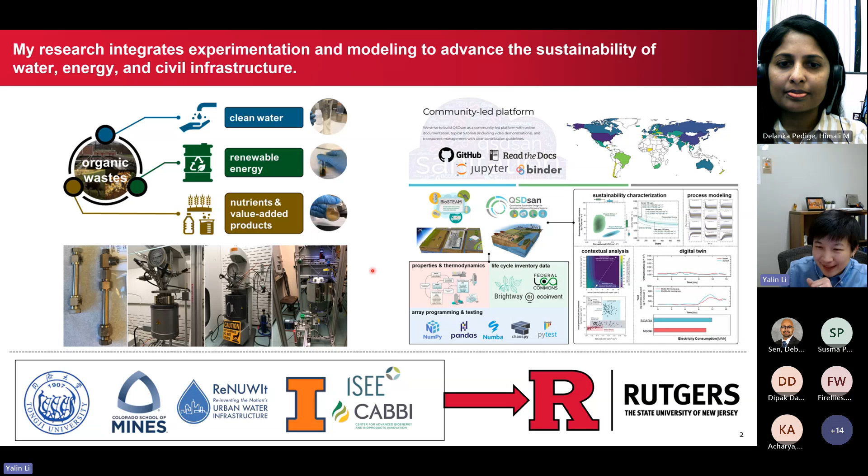And then as we are trying to reduce our greenhouse gas emissions in this sector, there are a lot of legislations or incentives from the federal and state levels to essentially try to incentivize the use of low carbon emission concrete.

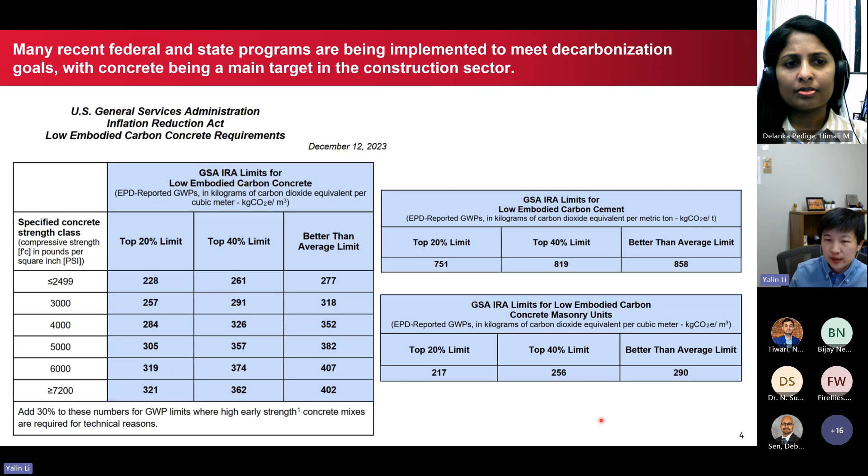As you can see on the left side, it's essentially for different strength classes of the concrete. It sets the upper limit of the greenhouse gas emissions. And then on the right are essentially the different tables for cement as well as for the concrete masonry units.

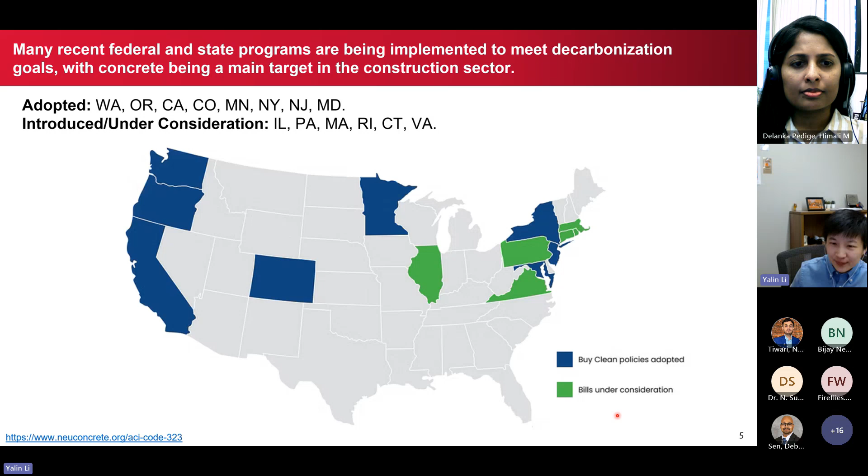And then the green ones are the ones that have either introduced this bill or there are bills under consideration for similar efforts. And this includes Illinois, Pennsylvania, Massachusetts, Rhode Island, Connecticut, and Virginia. And then to tell you a little bit more about what those laws can look like, I'm giving the example of New Jersey.

New Jersey passed two legislations to provide a tax credit to incentivize the procurement of low embodied carbon concrete. This applies for both the corporate business tax and gross income tax, so it's both to the consumers and also to the business. The first one is called Public Law 2021, Chapter 278. It was passed in 2021.

It essentially provides a tax credit of $2 per square foot of unit concrete products if it meets the following requirements. First of all, it has to demonstrate over 50% reduction in greenhouse gas emissions, and then you have to buy more than 100 square feet of that. And then it sets a limit of less than $3,000 for residential properties or $30,000 for commercial properties.

And then it cannot exceed your tax liability. So essentially, you cannot get a tax refund from the state government if you don't pay tax at all. And then it should cost New Jersey less than $20 million a year. So that was the law for 2021.

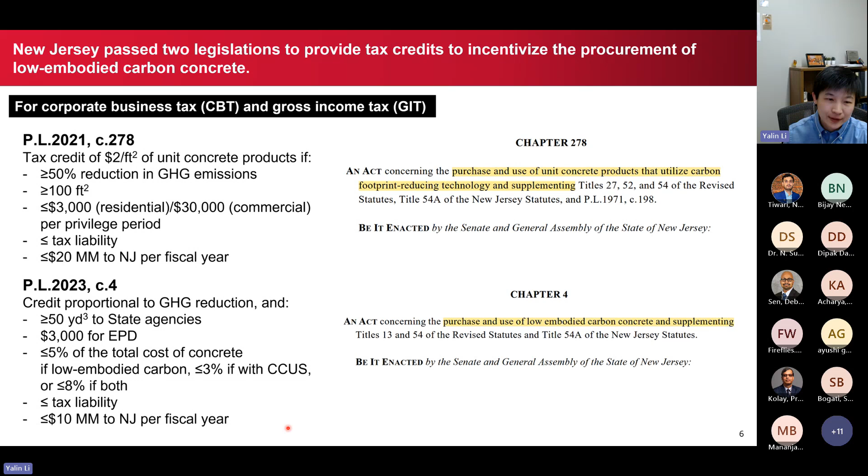So this is like very large scale incentives, and this is why New Jersey is setting this kind of limit here. And then getting back to Illinois, I did look into the bills introduced in Illinois. It was introduced in 2024, which was last year, to provide these incentives for carbon utilization, reduction, and removal.

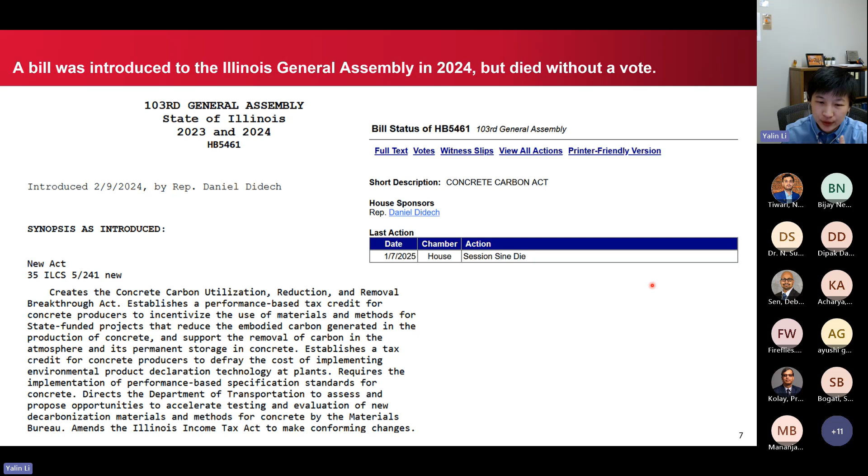However, the current status is called sine die, which essentially means during the past session, the legislators did not discuss this bill at all. So right now it's basically introduced, but there's no vote on this bill. So I'm not sure if this bill will be reintroduced or discussed in Illinois in the near future.

So previously I mentioned the so-called low embodied carbon concrete, and how can we define this? What is called a low embodied carbon concrete, and how can we determine the emissions associated with the production of the concrete? So we use a method called life cycle assessment. Some of you probably have heard of this.

It essentially is the compilation and evaluation of the inputs, outputs, and the potential environmental impacts of product systems. There are two very fundamental standards published by the International Organization for Standardization, ISO 14040 and 14044. These two standards set the method for performing life cycle assessment, or LCA, which includes 4 key steps. The first one is the goal and scope definition, where you have to set the boundary of the system. The second one is inventory analysis, looking at what inventory you have in your product system, like what are the inputs and outputs of your system.

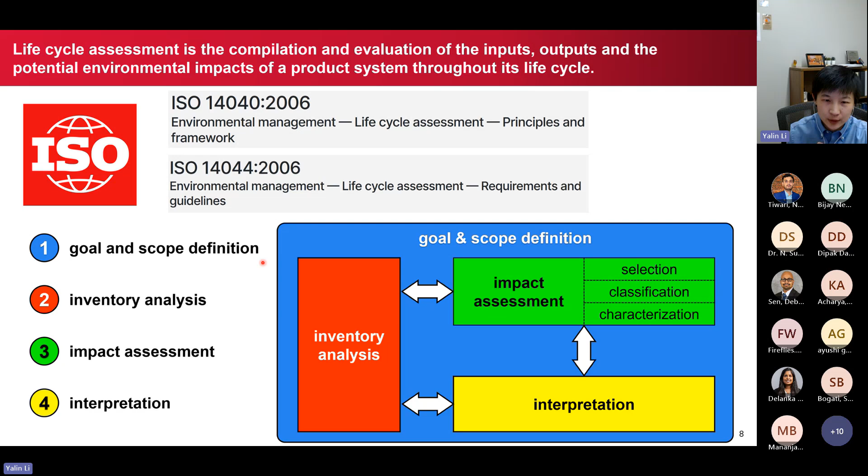The third one is impact assessment. In this step, you use different impact assessment methods to determine the environmental impacts associated with the inventory items. And the final step is interpretation. So taking all of this together, you want to look at the results and understand what the implications of these results are. So that was sort of an abstract framework, and then a little bit more details here.

There could be the product stage, which means you produce something. If you hear terms like cradle to gate analysis, that only includes the product stage, which is from the extraction of the raw materials to the completion of the production of the finished product at the factory gate. That's why it's called cradle to gate. There's also the construction process, the use stage, and the end of life stage. But for the EPD purpose, usually only the product stage is considered.

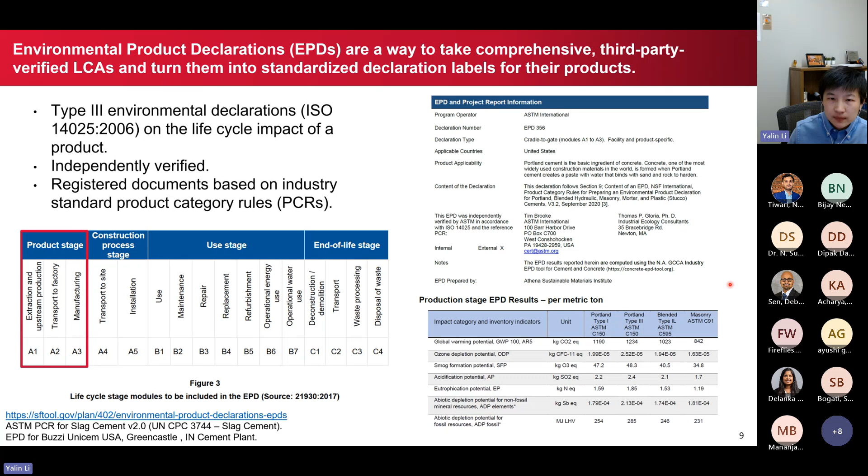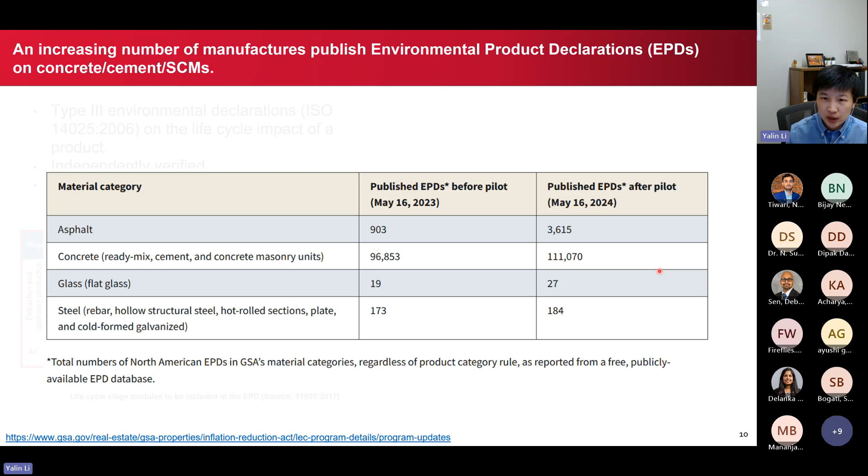You can see concrete among the main materials that have a lot of emissions: asphalt, concrete, glass, and steel. Concrete is the industry that has the most EPDs, and that far exceeds other industries. So this, I would think, is a positive part for the concrete business.

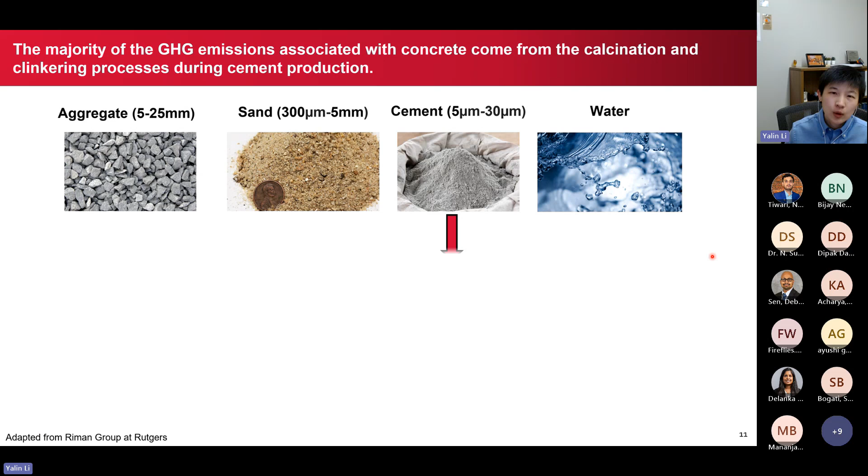All right, so I talk a lot about concrete being a very large part of greenhouse gas emissions at a global scale. So why does it have so much emissions? If you think of what goes into a concrete, there's the aggregate part, or some people call it coarse aggregate. There's also the sand, which is the fine aggregate, and then there's the cement, which serves essentially as the binder that glues the different materials together, and there's also water. So cement is a main part of the emissions here.

And if we think about how we produce cement, we extract the raw materials, including limestone and other oxides, and then there's a calcination process. If you look at the main ingredient of limestone, which is essentially calcium carbonate, during the calcination process it gives one-to-one molar carbon dioxide. The temperature is very high, 900 degrees C at calcination, and the next step, the clinkering process, happens at 1450 degrees C. That is an even higher temperature.

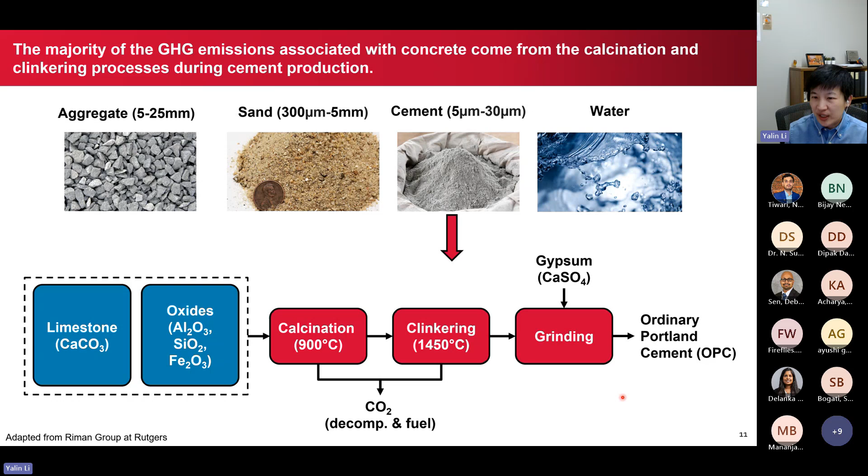In both of these steps, in addition to the one-to-one emissions of carbon dioxide from decomposition, there's also the energy consideration. So all of that adds up to the majority of the emissions associated with cement, and thus concrete. There are also some other steps you need to get what we call ordinary Portland cement, which is the most used type of cement, and people usually just call it OPC.

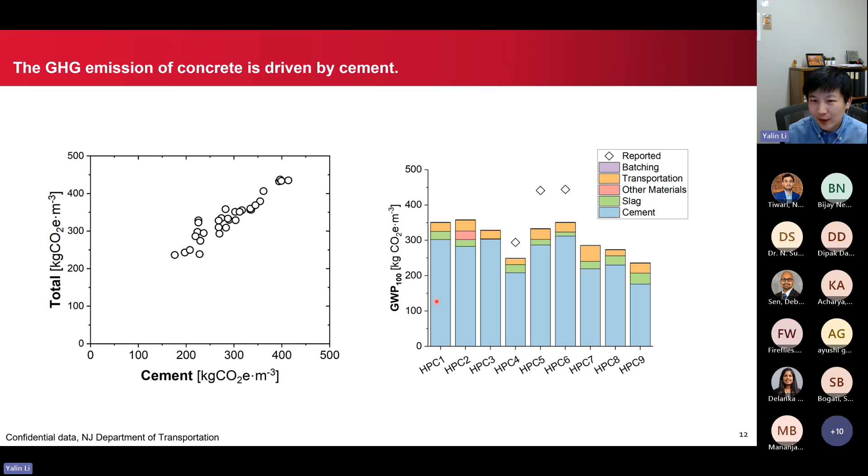So here is some data that we got from the New Jersey Department of Transportation. They have different contractors, and each contractor provides them with EPDs. On the figure on the right, the overall column would be the total emissions of certain concrete, and the blue part is the emissions from cement. So essentially cement accounts for 80–90% of total emissions for certain concrete types.

When we think of how we can reduce emissions in concrete, the first low-hanging fruit is to use supplementary cementitious materials, or SCMs, to partially replace cement. Recall that cement is essentially the binder material in concrete. When you harden the concrete, hydration reactions turn the OPC into calcium silicate hydrates, which we call active materials that can bind the aggregate together.

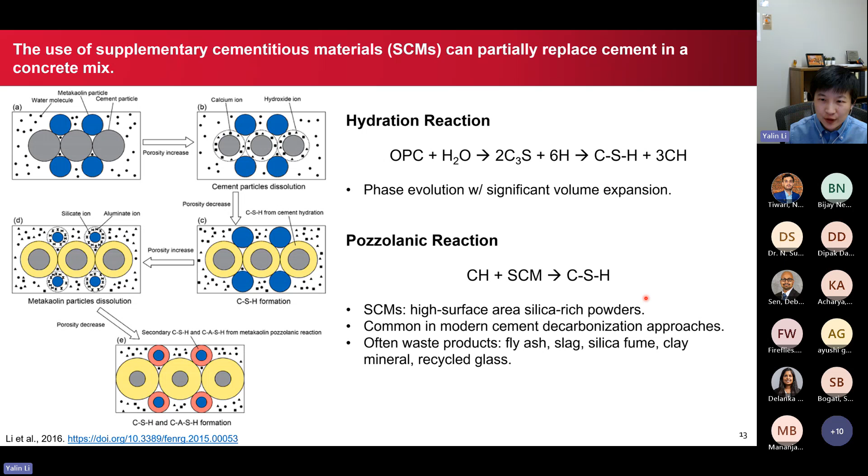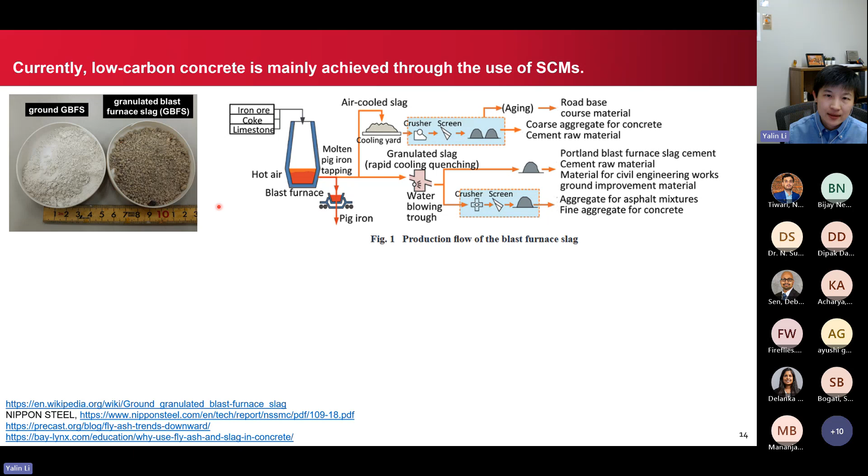Some SCMs can also form these binding calcium silicate hydrates, so they can be used to partially replace cement and therefore reduce the total emissions. The two most widely used SCMs at this stage: the first is granulated blast furnace slag, or GBFS, and people usually just call it slag. These are waste products or byproducts from the steel industry. It's usually a waste without much use, so using slag in concrete production is actually very beneficial.

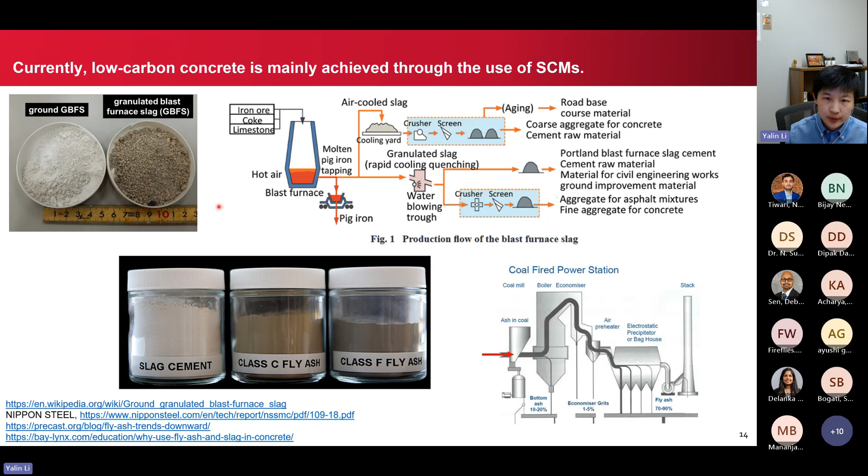The second is fly ash, which is an ash product from coal power plants. When you burn coal to generate electricity, the ash can be used as an SCM in your concrete mix. And if we look at the EPDs, these are essentially mix formulas we got from contractors of the New Jersey Department of Transportation. A lot of the greenhouse gas emission reduction actually comes simply from replacing cement with SCMs.

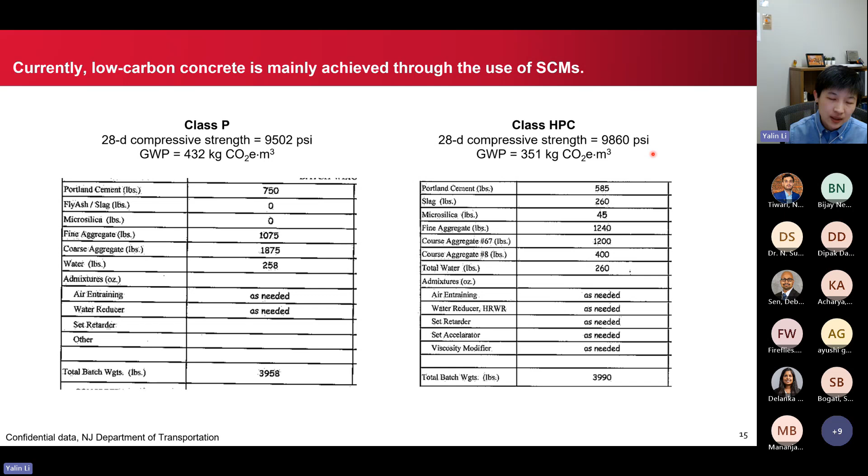So these changes essentially lead to the reduction in greenhouse gas emissions. That all sounds nice, but if we look at how much of these supplementary cementitious materials we have versus how much cement we use, you'll quickly realize that the amount of SCM materials is not sufficient to meet our demands.

So here on the top part are essentially the usually considered SCMs. And then here you can see that in comparison with Portland cement, the quantity just does not add up. So that's why in some studies they look at filler materials and calcined clays to reduce the overall emissions with the cement and concrete, but they also have their own problems.

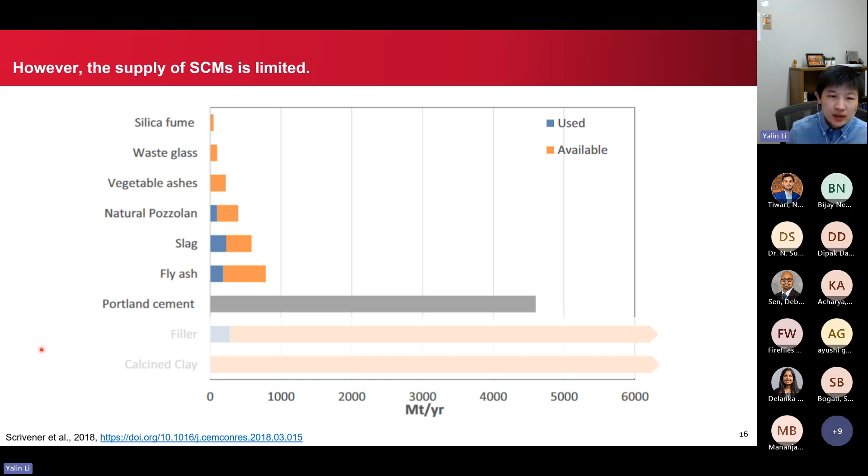That leads to the next part, which a lot of researchers and companies are looking at: different ways to recycle waste concrete rubble. For example, here are some studies which develop technologies to break the waste concrete rubble and turn it into different materials that can be reused when making new concrete.

So this process starts with the end-of-life concrete, and first uses a jaw crusher and impact crusher to crush the rubble into smaller materials. Then there's a rotor to separate the crushed particles based on their sizes, and an air sifter to further break it down into different sizes.

After this process, you'll have 3 different parts: the first, the coarse part, which is of the size 4 to 12 millimeters, the second part is less than 4 millimeters, and the finest part is less than 1 millimeter.

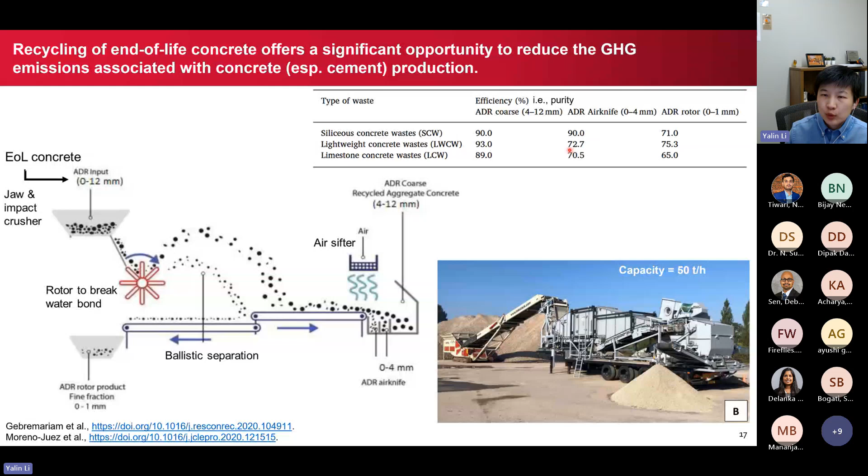If we compare the purity of the products, the coarse products, called ADR coarse products, can be 90%+ pure, and this can be directly used as coarse aggregates when remaking concrete. The next 2 parts are not as pure, so they have a further technology to purify them.

They put the medium and finest parts that come from the previous process into the next stage, which further separates and purifies them into fine products and ultra fine products.

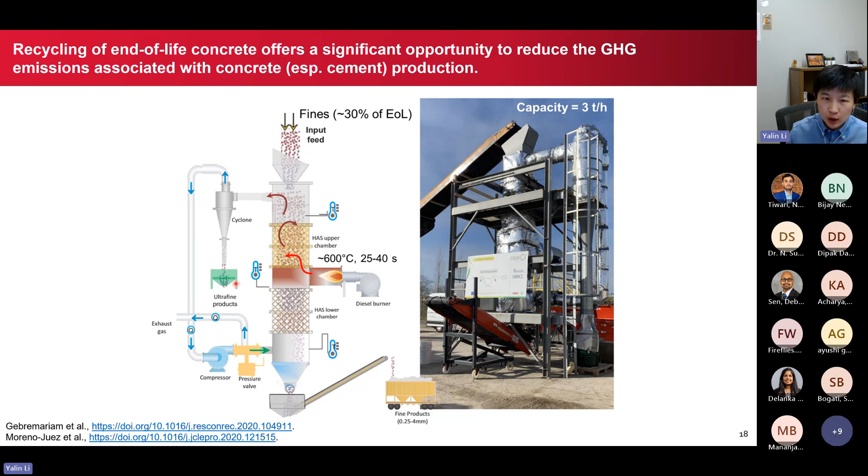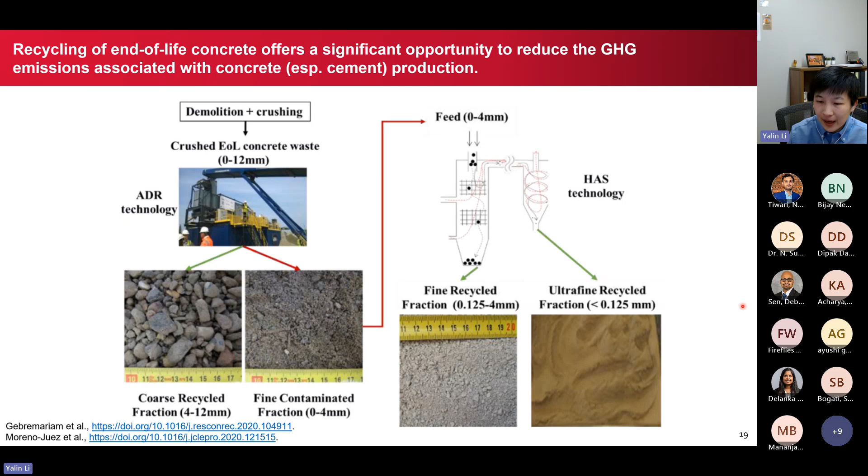So what they propose is essentially using the end-of-life concrete waste to get recycled coarse materials, further separated fine materials that can replace fine aggregates, and an ultra fine part that can be used either as a filler or as a direct replacement of the cement part.

So we did some rough cost estimations of these technologies. In order to recycle 1 ton of concrete, all the costs add up to around $15 per ton.

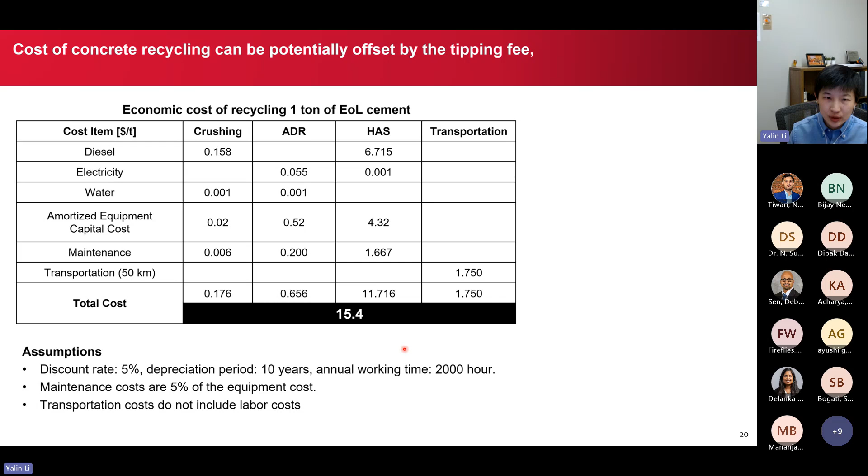And then if you think about it, right now there are concrete recycling facilities that charge a tipping fee of around $10 to $15 per ton to help you recycle or get rid of your concrete waste. So the tipping fee can pretty much cover the cost of the recycling part, but there are also economic benefits from using these technologies.

You will have the coarse, fine, and ultra fine aggregates that can be reused when making new concrete. Depending on how pure your products are, the economic benefits from recycling can be 10 to $70+ per ton. So this essentially means you could benefit economically from using such processes to recycle your concrete.

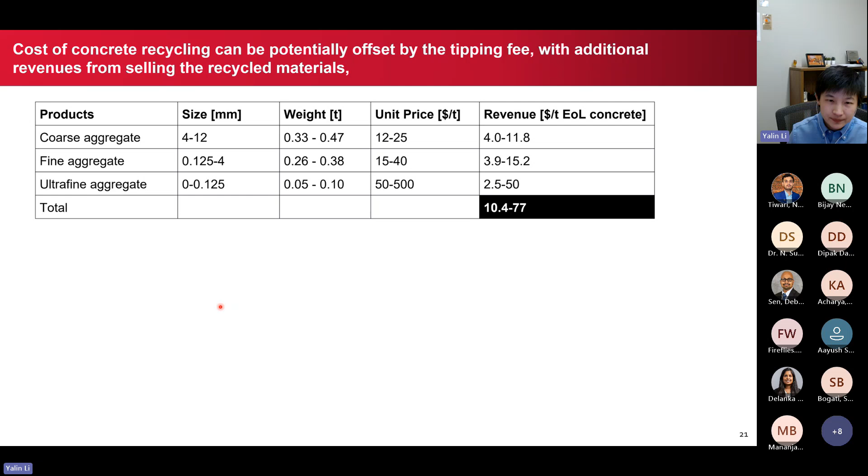We also did some calculations related to the greenhouse gas emissions of this process. Using the displacement method for the coarse and fine aggregates, the production of the ultra fine aggregates, which we think can be used as filler materials or to replace cement, has emissions around 250 kilograms of carbon dioxide per ton. Compared to ordinary Portland cement, this is only 30% of the emission. So recycling this material can greatly reduce the greenhouse gas emissions associated with it.

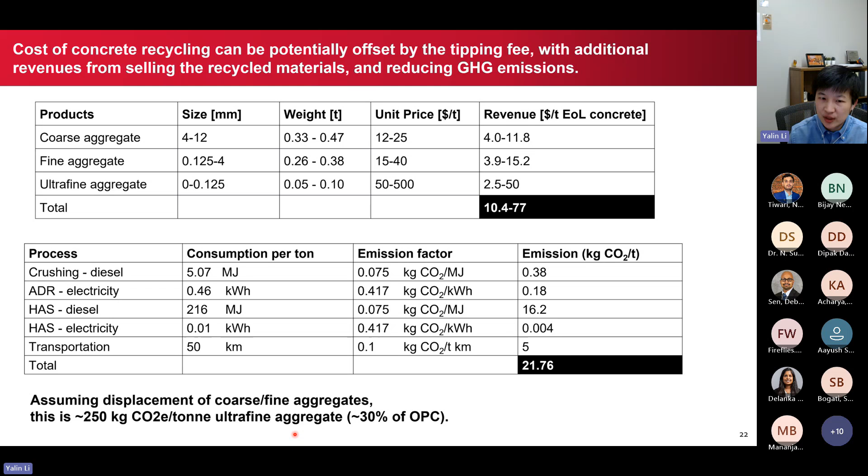So this is one technology looking at the recycling of waste concrete. At Rutgers, we also worked with researchers from material science and civil engineering on looking at other different processes.

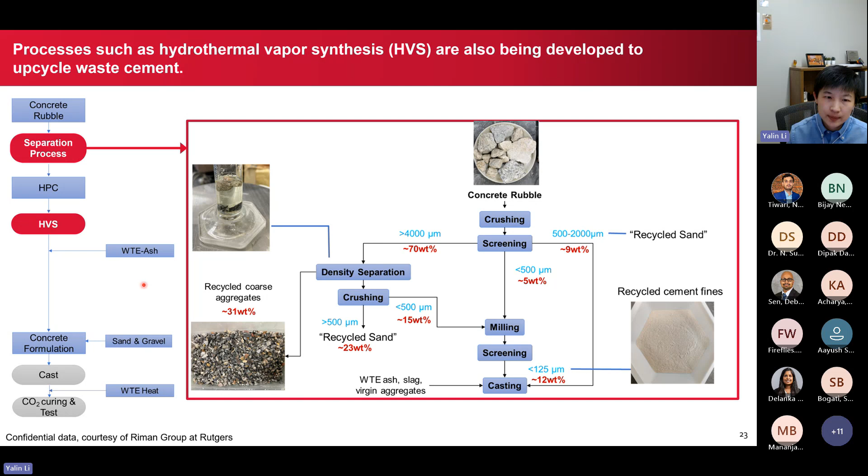Okay, so all those are concrete recycling technologies. But one part I didn't mention actually has quite some potential in decarbonizing concrete materials, essentially through the carbonation process.

As we mentioned, one big part of the emissions associated with cement is essentially from the calcination process, where you emit a 1-to-1 ratio of carbon dioxide when you start with limestone, which is essentially calcium carbonate. This means that when you have cement, you can recarbonate it and get back that carbon dioxide. A lot of the concrete in use right now will gradually pick up carbon dioxide, but it's just a slow process.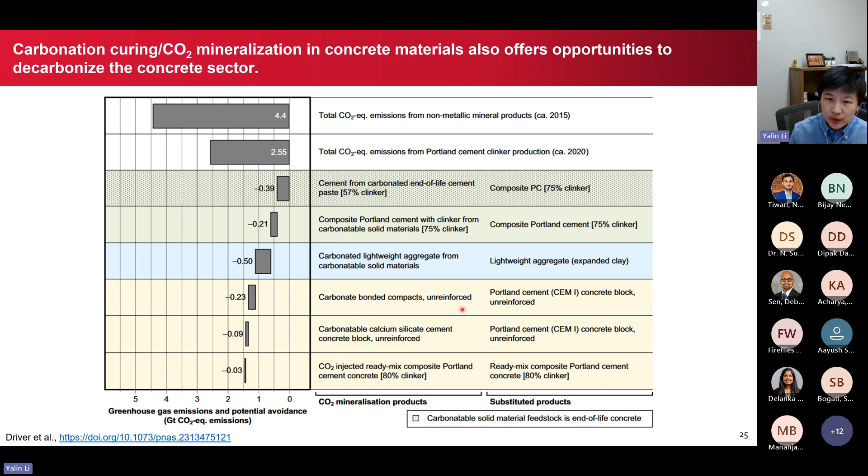The next table shows how much you can produce from this process. They estimate total carbon dioxide emissions from mineral products is around 4.4 gigatons per year. Just carbonating the end-of-life cement paste would offset around 0.39 gigatons per year. There are also different materials you can carbonate to pick up carbon dioxide. This carbonation alone adds up to around 15% of total emissions associated with these sectors. So you can see there are different ways we can reduce greenhouse gas emissions associated with concrete.

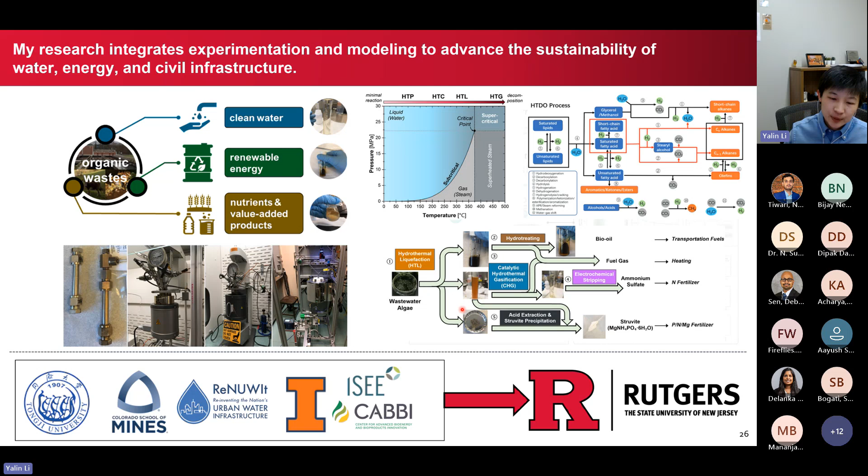All right, so that basically wraps up my talk associated with the construction and concrete sectors. Next, I want to touch a little bit on the experimental part of my research related to hydrothermal technologies, and also talk a bit about the sustainability analysis we've done for other sectors.

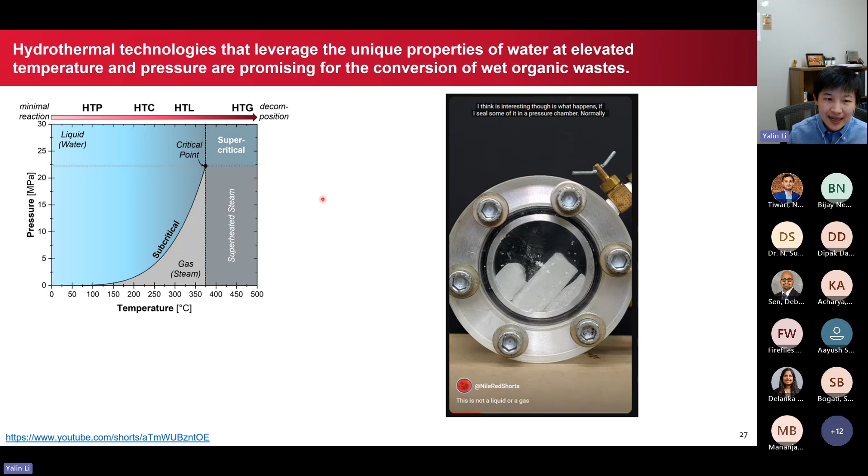First, I want to give you a brief introduction, something I like to show when I talk about hydrothermal technologies. These technologies essentially happen at high temperature and pressure. Here I'm showing a phase diagram of water, with temperature on the x-axis and pressure on the y-axis. As you go up in temperature, the pressure also goes up, and there's a critical point of water. Once you go beyond the critical point, you enter the supercritical condition of water. So either in subcritical or supercritical conditions, water—and really any material—will have very different properties than what you'd observe in the lab.

So here I'm going to play a small video to show you the supercritical condition of carbon dioxide. This is carbon dioxide because it has a relatively lower supercritical condition. You can see once we heat it up, the carbon dioxide turns into liquid carbon dioxide. Once you go beyond the supercritical conditions, you no longer see a separate liquid phase of carbon dioxide—it's just one phase. Then once you cool it down, it goes back to the liquid phase. A similar thing happens for water as well.

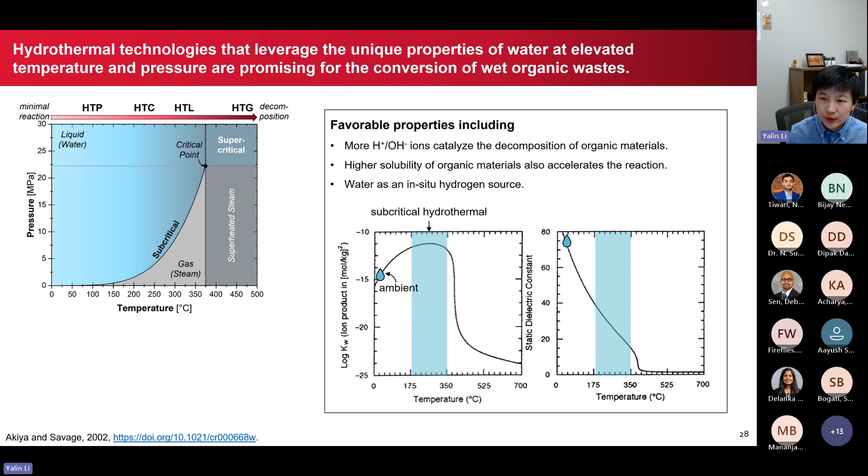Even under subcritical conditions, water has unique properties that favor the decomposition of organic materials. This includes an increase in the ion product values—at ambient conditions, water has a Kw of 10 to the negative 14th, but at 300 degrees Celsius, you get much higher Kw values. The dielectric constant of water also decreases, which means it becomes a better solvent for organic materials, and this helps accelerate decomposition. Finally, water is actually an in situ source of hydrogen, and you can use aqueous reforming processes to essentially eliminate the use of external hydrogen when trying to make renewable fuels.

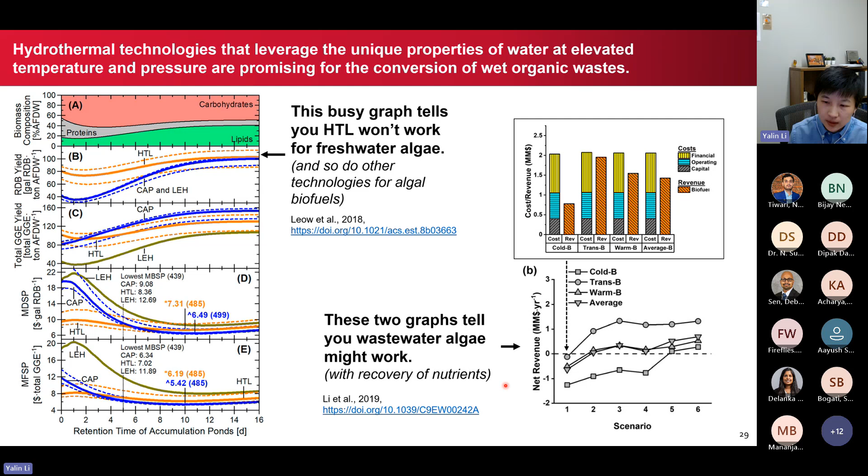We also did some analysis, in collaboration with New Mexico State University, looking at what if instead of using freshwater algae, we use algae growing on wastewater. We looked at different scenarios, and this figure shows the net revenue, and you obviously want the net revenue to be positive values. After looking at different scenarios and different seasons of the algae, we essentially showed that there's a possibility to have a net revenue. So freshwater algae might not work to produce renewable fuels, but wastewater algae might work.

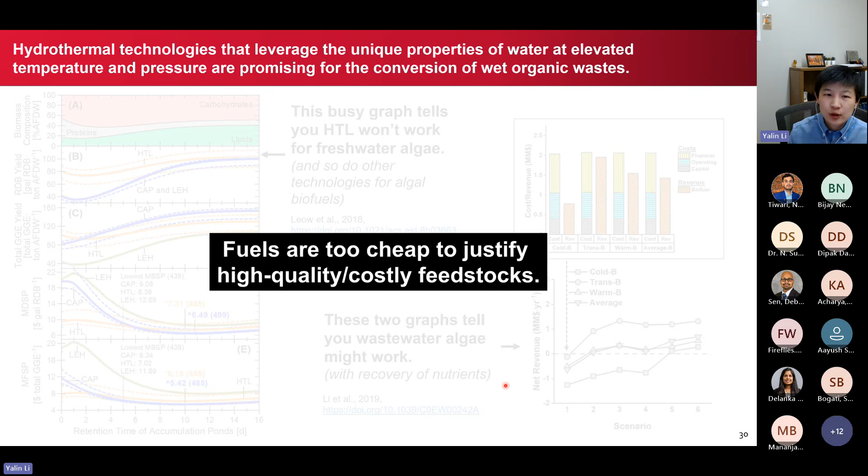So the takeaway here is essentially fuels are actually very cheap. It's too cheap to justify the use of high quality or costly feedstocks.

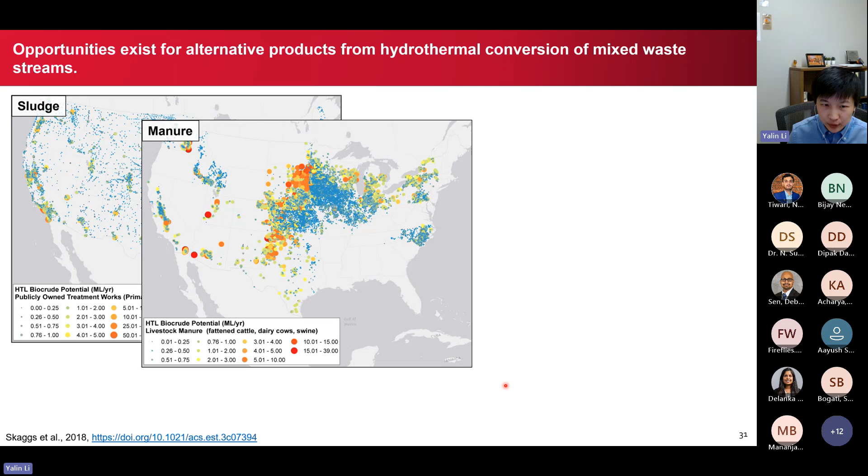Following this research, next we'll look at: if we know hydrothermal technologies are not very good when using very expensive or pure feedstocks, then what waste feedstocks do we have that can potentially be used? There's sludge from wastewater treatment facilities, animal manures, food waste, and also fat, oil and grease.

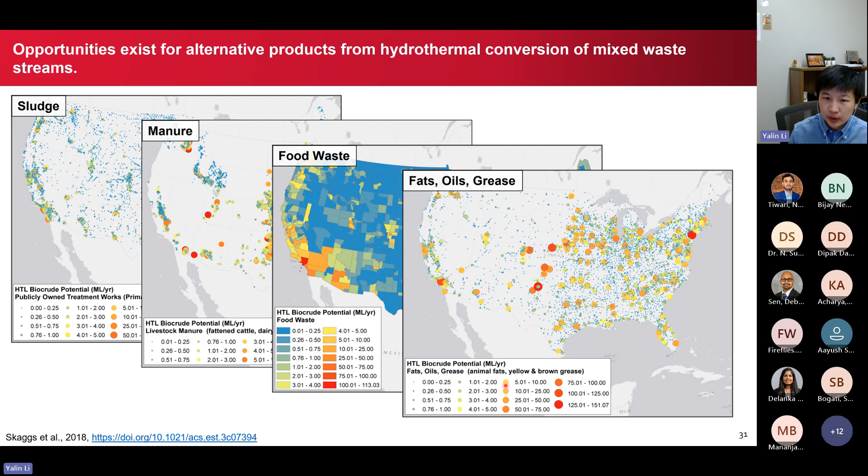All of these are potential feedstocks that can be used in hydrothermal processes to produce renewable fuels and also materials. This is at least one of the projects we are working on, which uses food waste and swine manure as feedstocks.

After some hydrothermal reactions and different separation methods, we can upgrade the aqueous products from HTL into fertilizers. We can produce biofuels that can be used directly as drop-in biofuels. And we can also produce biobinders that can be used to make bio asphalt.

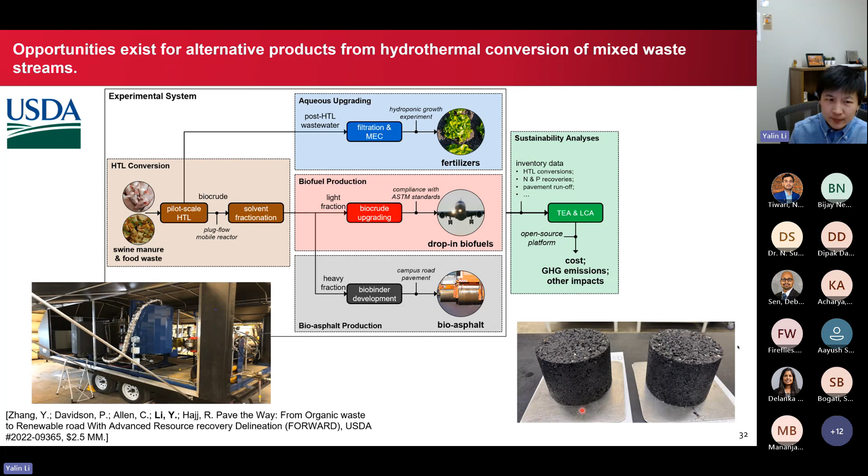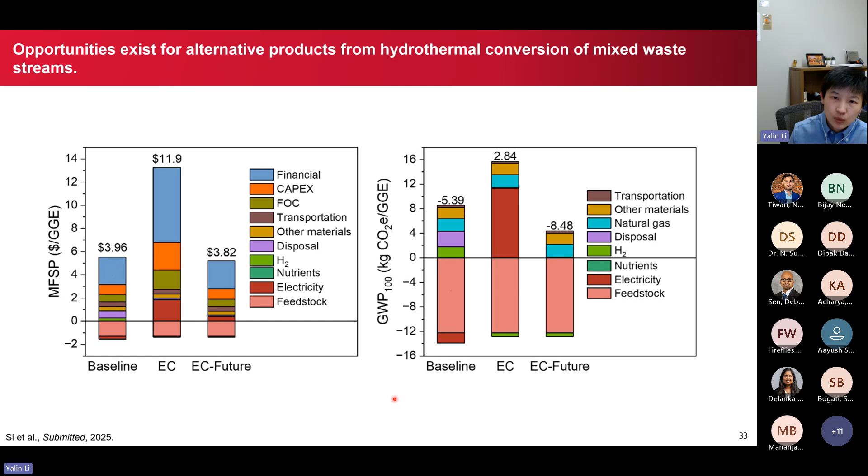We also performed techno-economic analysis and life cycle assessments of these processes. There are different scenarios here, but the left figure shows the selling price of the fuel, and the right figure shows the greenhouse gas emissions. Our baseline scenario, and some scenarios using the electrochemical process to deal with the aqueous products from the HTL, can arrive at a cost close to the current cost of fuels. On the right, you can see the greenhouse gas emissions associated with these fuels are much lower compared to what we'd expect for fossil fuels.

Back to the binder systems we talked about, my student ran a different analysis with different scenarios. On the left shows the cost, and you can see the binder cost we get right now is even in the negative range. Currently, fossil-based binders usually sell for about 10 cents per kilogram, so this cost will actually be lower compared to current asphalt binders. On the right shows the greenhouse gas emissions, also in the negative range. So there's a lot of potential there.

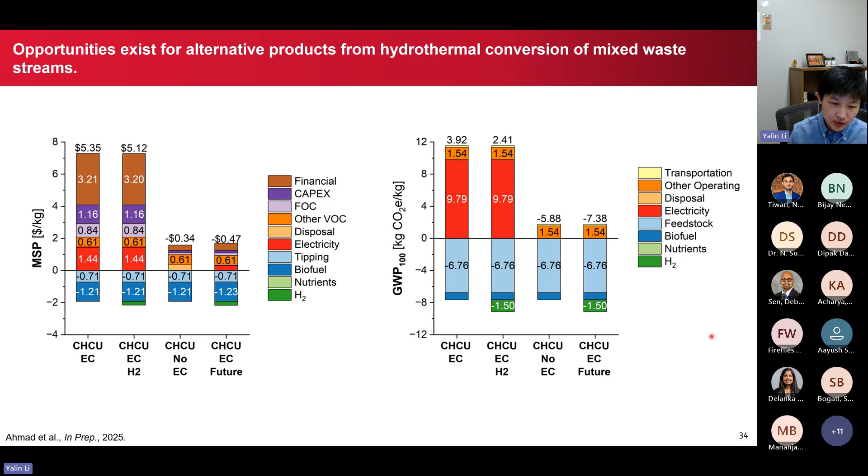So next, a different example I want to show you is the approach we use for TEA and LCA, the techno-economic analysis and life cycle assessment.

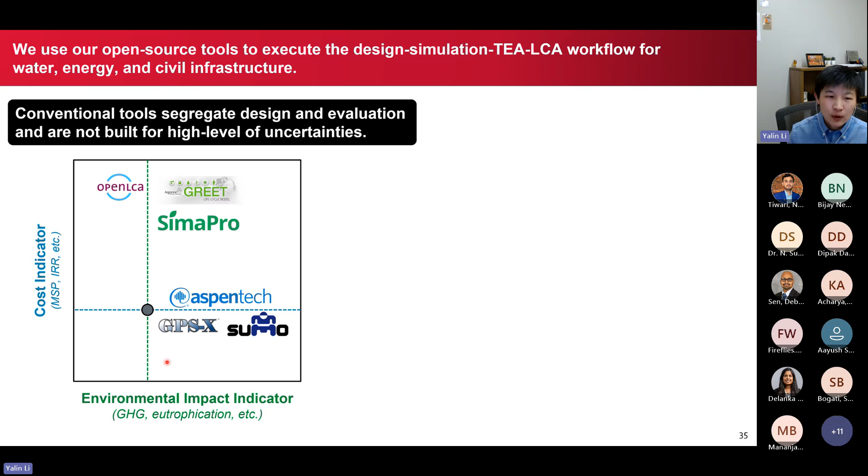So as you can see from my previous slide, when we are doing analysis, we rarely only look at one scenario or one combination of the inputs. This is very different from the traditional ways of doing TEA and LCAs, where you use process simulators and lifecycle assessment tools, and you have very limited ways of doing flexible research. You essentially guess maybe one or two numbers for the greenhouse gas emission and one or two numbers for the cost.

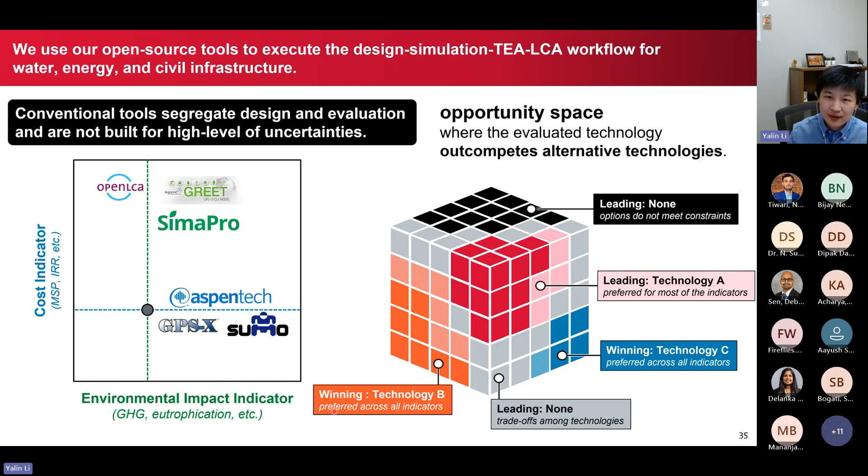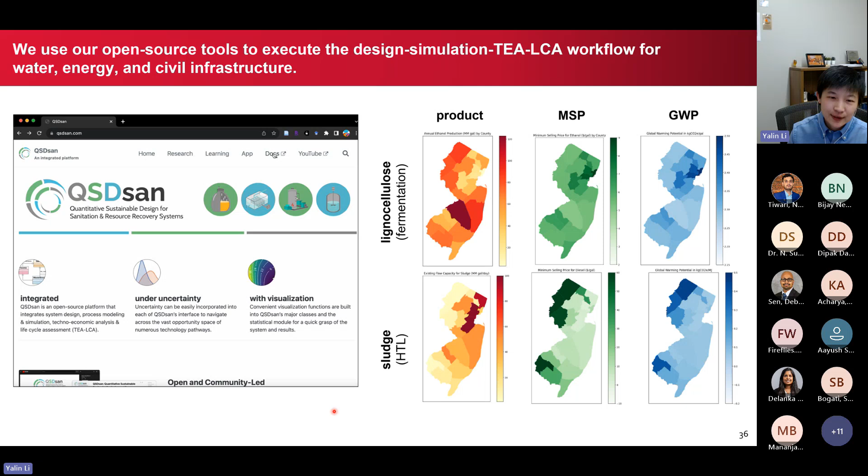But the way we do it is we look at very different combinations of the scenarios and parameter inputs, because our expectation is that if you are considering multiple technologies, then in different contexts, different technologies might be the optimal choice. And we develop our open source tools to do this TEA analysis. On the left-hand side is a web page we developed for the tool called QSDsan, which is for the quantitative sustainable design of sanitation and resource recovery technologies.

And on the right-hand side, it's actually an undergrad student who did his summer project looking at the bioenergy potentials from New Jersey. Here you can see how much of the products you can get from different counties of New Jersey based on how much biomass or waste we have in the different counties.

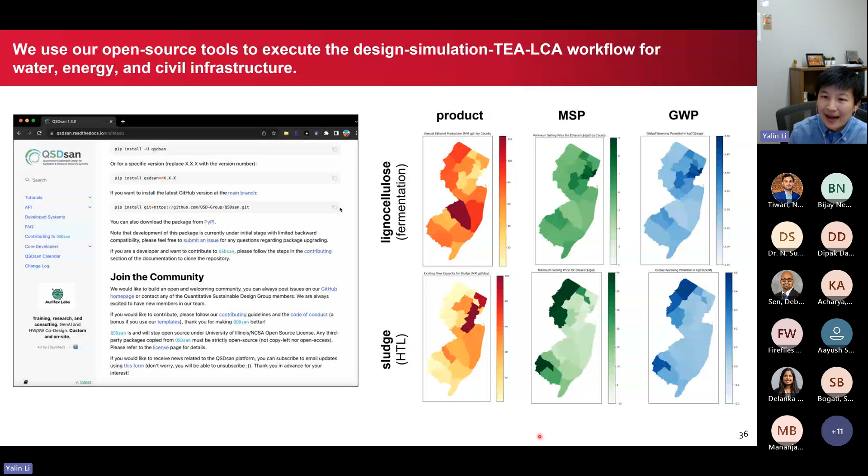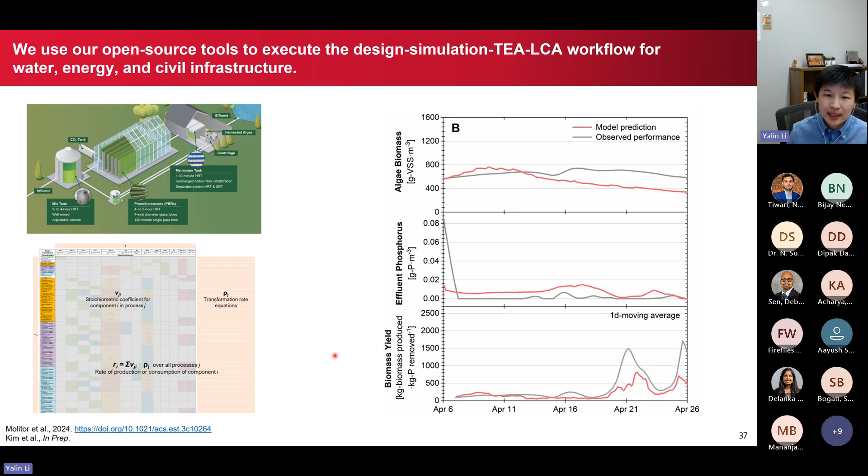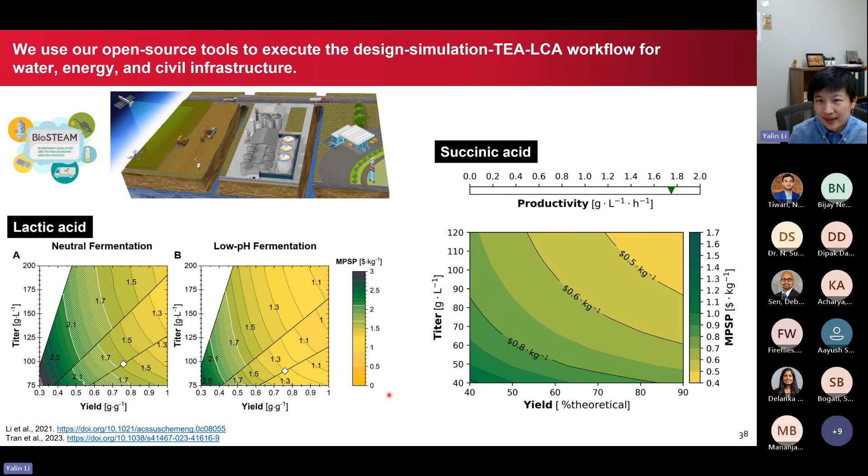These figures on the left are evaluations at a fixed productivity. And on the right, this GIF shows that we can also do similar analysis for different productivities at different titer and yield combinations. The results shown are for succinic acid, which is another very promising biochemical.

And some of the ongoing research I'm doing now, which is also exciting, is this center, PreFerS, the Center for Precision Fermentation and Sustainability. This is a large collaboration between Singapore's National Research Foundation and researchers here in the US. The main goal is to help Singapore realize their 30 by 30 goal, because Singapore is a very small nation and doesn't really have land for agriculture. So food security is very important, and they want to be able to produce nutrition for their own citizens. Because they are in a tropical area and their neighboring countries have a lot of sugar, they want to develop fermentation technologies to produce proteins and healthy lipids from sugars. This is what the PreFerS Center is for.

In this center, there are a lot of synthetic biologists using synthetic biology to produce food ingredients from sugar, and then formulate those ingredients into actual food. My role in this center is using sustainability analysis to help them prioritize their research and to understand the implications. For example, what titer they need to reach for the produced food ingredient to be market competitive.

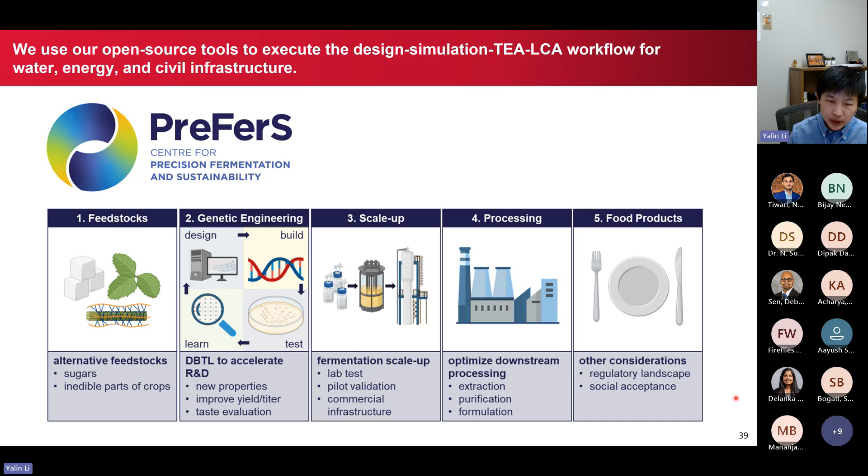And that wraps up my talk here. So my talk today touched on some specific examples related to concrete production. I talked about how this sustainability analysis and design can be used to prioritize technology development in a lot of different sectors. And with that, I'm open for questions. Okay, I think we have some time for questions.

Thank you, Dr. Li, for this very broad range. I'm impressed how you condensed everything into this limited time. I know you are doing a very wide range of experiments, starting with the carbon reduction in concrete, and then the transition to thermochemical processes to generate biofuel and everything. And then you walked us through this useful open source platform where we can do techno-economic analysis and life cycle assessment. So thank you so much for taking time to enlighten us through all this data.

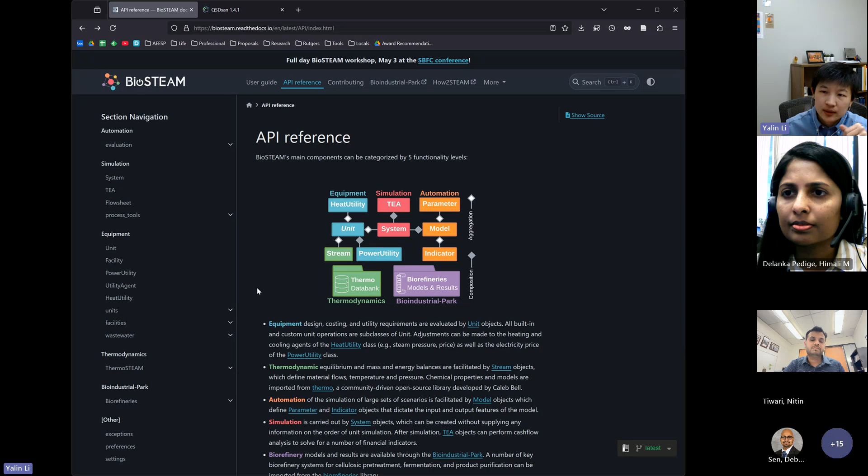Thank you, Professor Dr. Tiwari. So am I audible right now? Yeah, you are. Yes. Actually, I'm just writing in the chat box, but in my settings the chat is not available to write text, so I can't write. Yeah, so go ahead with the question.